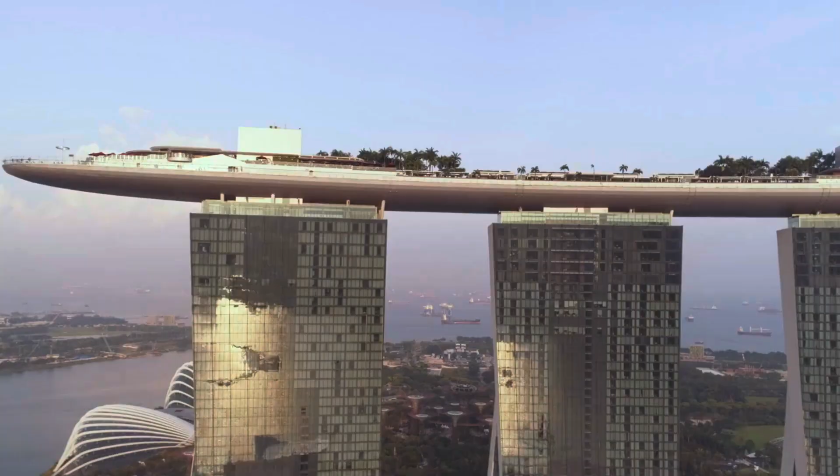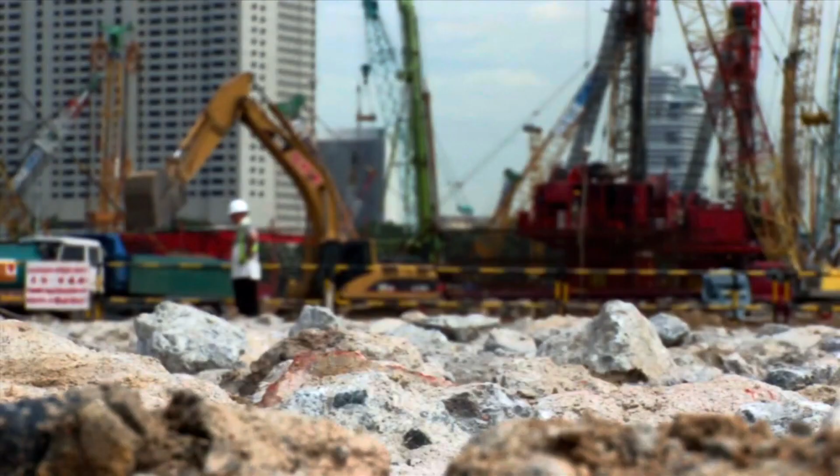During the construction of Marina Bay Sands in Singapore, engineers had to face such a challenge that they had never imagined. According to the building design, a sky park was going to be built on top of 3 towers, whose size was supposed to be larger than the U.S. Navy's Nimitz aircraft carrier. And when it was time for the construction of the sky park, engineers found a major fault in the building design.

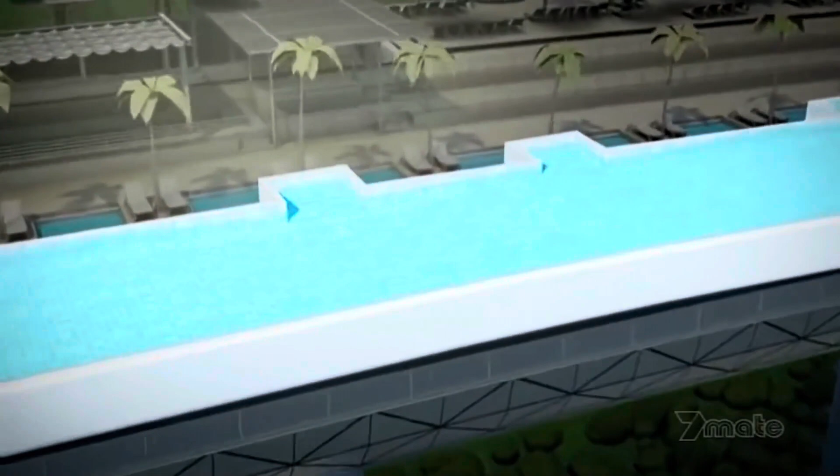The fault was that the 3 buildings might swing up to 200 millimeters during a tornado. And if the sky park was built despite this fault, then the swimming pool filled with 15 lakh liters of water might get cracked. The destruction that it would cause is unimaginable.

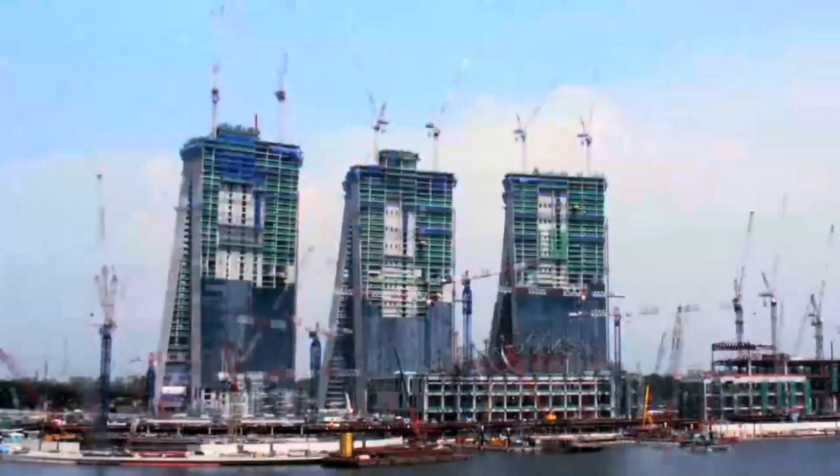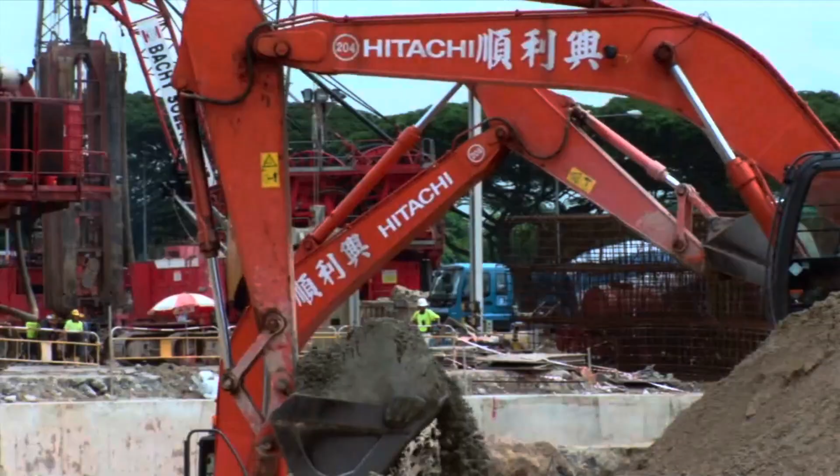On one hand, years of hard work and millions of dollars were spent on this project, and on the other hand, to drop the idea of the sky park would be like compromising with the beauty of the entire structure. They needed to find a solution which would keep the sky park safe despite the swinging of the building during strong winds. This was such a serious issue that the entire construction and architecture team was anxious.

But a miracle happened. Viewers, Singapore is a country which has only one city, and that is Singapore. The entire country is so small that it is slightly larger than the Indian city of Mumbai and a little smaller than the Pakistani capital Islamabad.

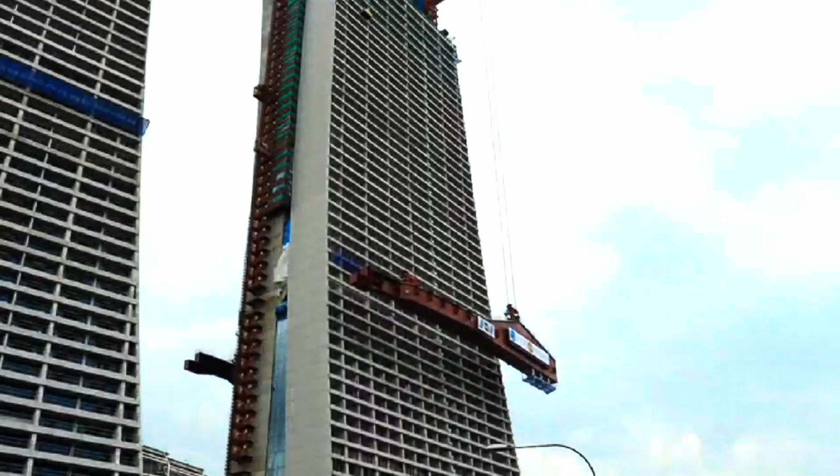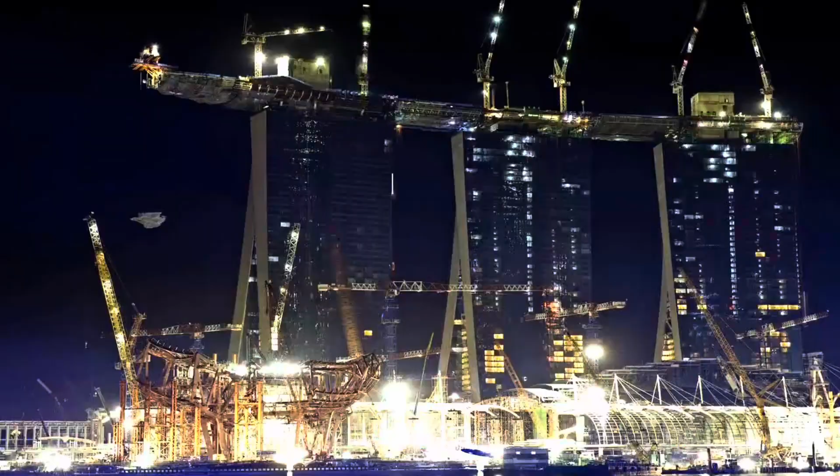Singapore's Marina Bay Sands is one of the most complicated construction projects in the entire world, and that's why it is called an engineering masterpiece. Engineers had to construct not 1 but 3 buildings, whose one portion was going to be bent, and that too taking support from the other portion.

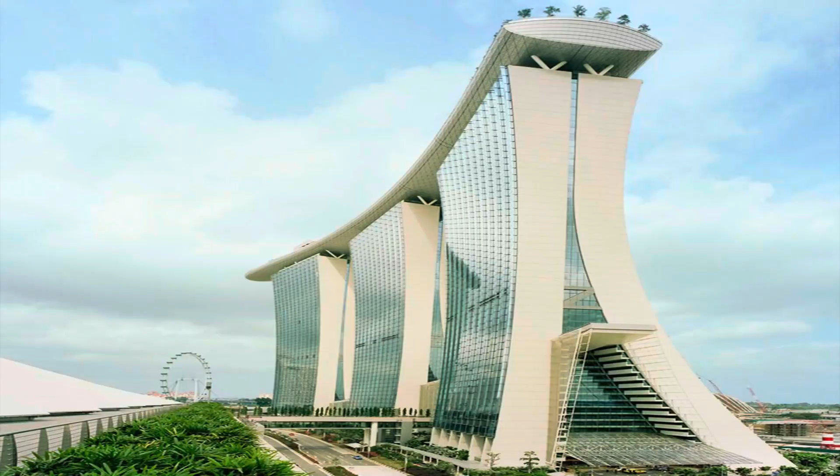The project, costing $8 billion, had 3 buildings 680 feet high, a sky park bigger than the aircraft carrier, a 200 feet high arts museum, and a floating entertainment pavilion were going to be constructed, that too above the water.

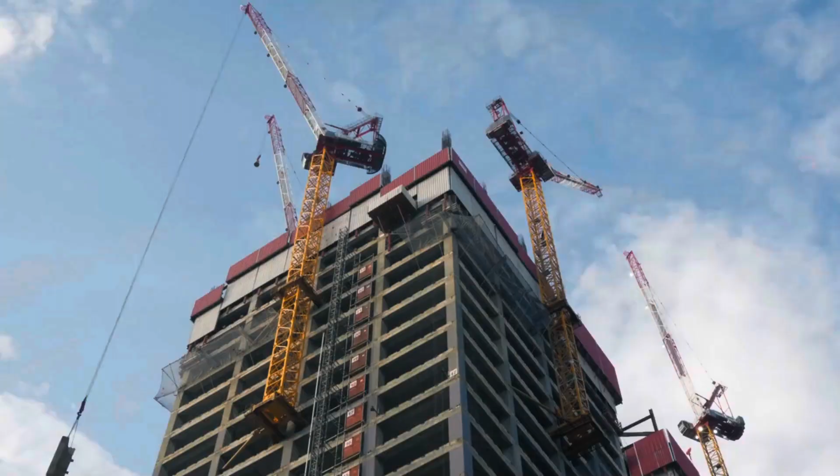The cost at which Marina Bay Sands was built, 5 Burj Khalifa-like buildings could have been made. And the labor and hard work needed to make this masterpiece was an astounding 16,500 workers, who worked together.

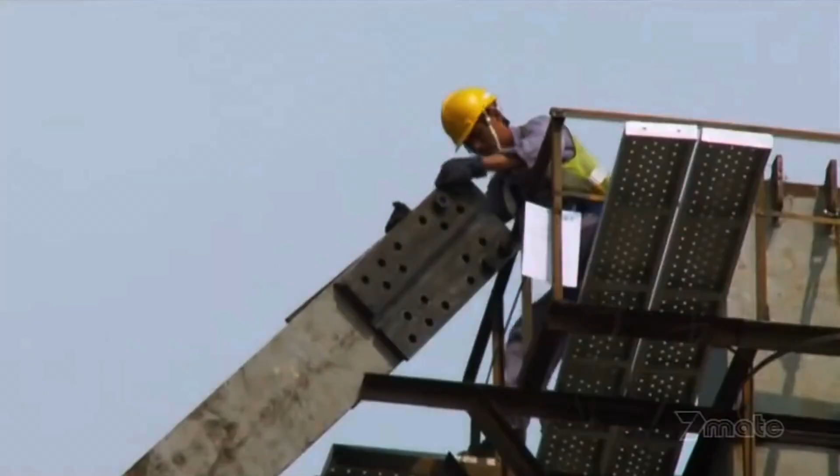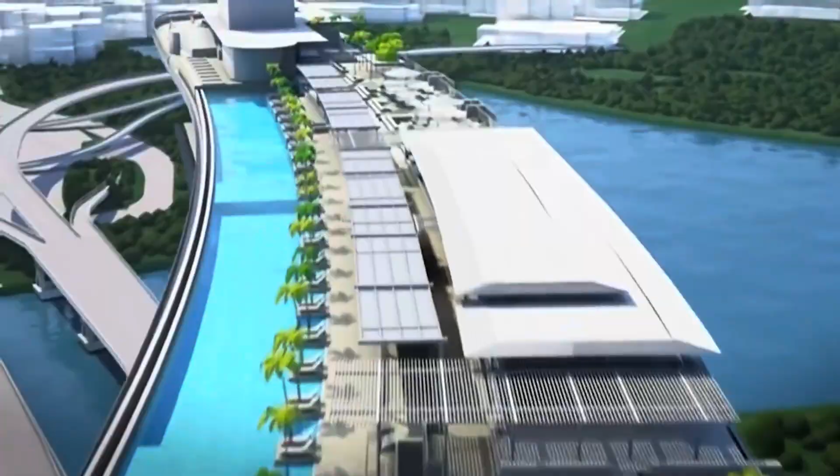Construction workers and engineers faced many challenges, like laying the foundation on soft wet soil near the seashore, to constructing a curved-shaped structure and a unique sky park over it. This was not only the first challenge of their life, but no construction project in the past had faced this kind of challenge. Let's come and see the challenges and their solutions.

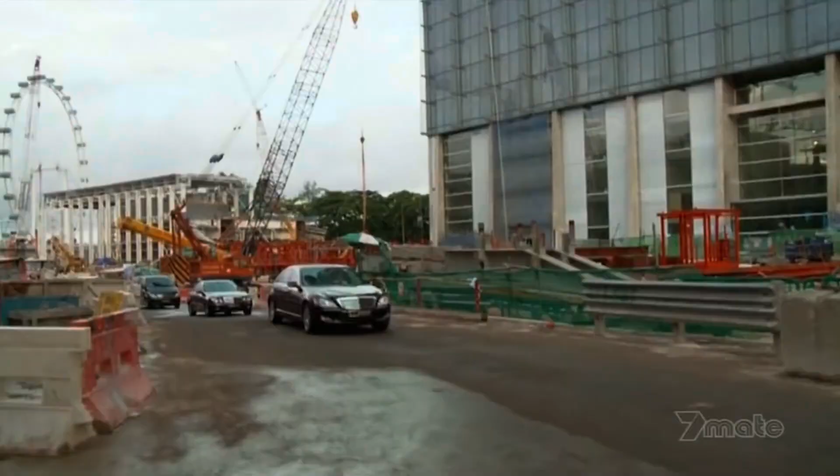Challenge number 1. It was American business tycoon and owner of Las Vegas Sands Corporation, Sheldon Adelson, who was behind the project, who has often been featured in Forbes' richest list. Adelson wanted to build a project that would become the identity of Singapore.

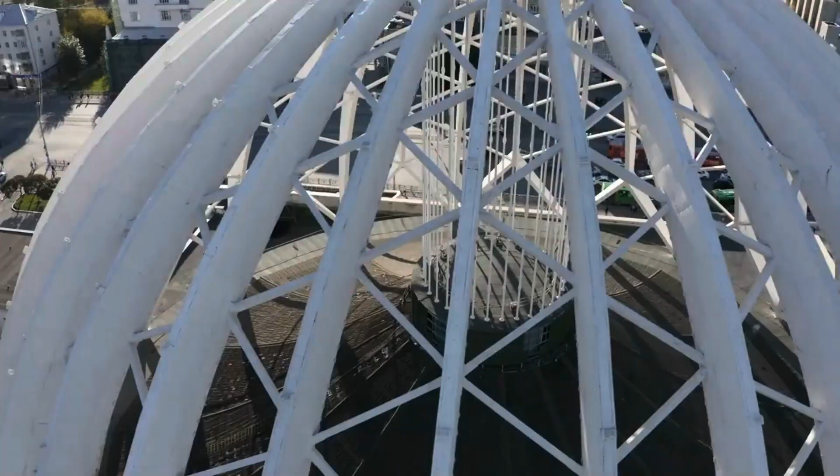And obviously, for such a project, its design had to be very unique. For this purpose, there was no better option than an architect like Moshe Safdie, whose curved designs are mind-boggling, but difficult to construct.

After months of hard work, Safdie presented his design. But this design presented a big challenge for the construction team. According to the construction team, it would take at least 7 years to complete the project, but Sheldon Adelson wanted to complete it within 3 years.

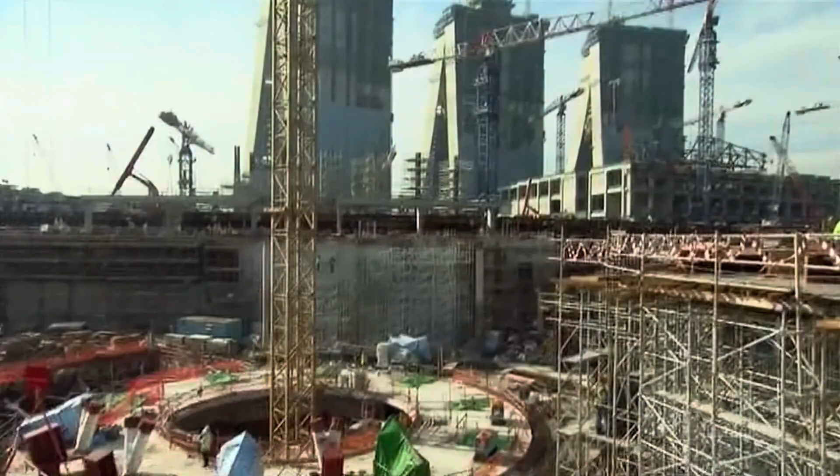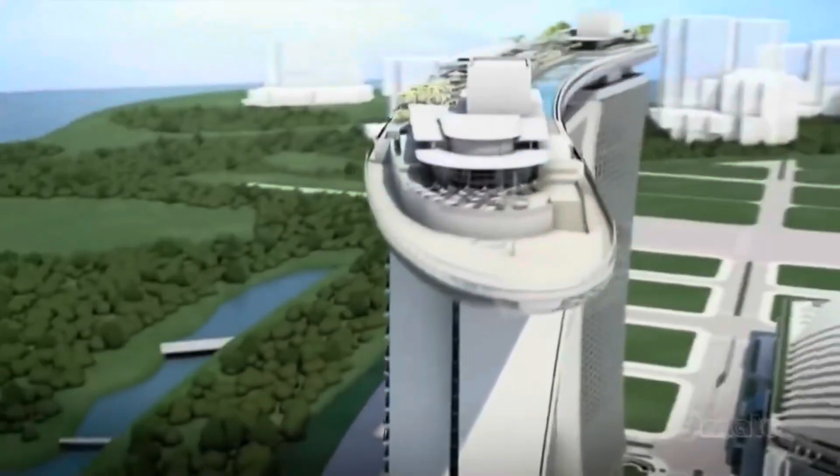In these 3 years, the entire project, with the 3 towers, its interior, museum, floating pavilion, and the most complex sky park, needed to be built. Accepting the challenge was a big achievement for the construction team in itself.

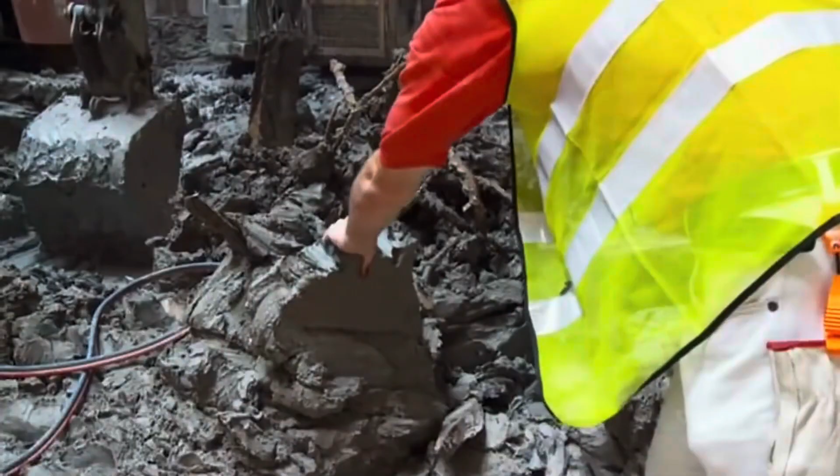Challenge number 2. The site chosen for the construction work was full of soft clay due to the proximity of the sea, which engineers call marine clay. The marine clay is very soft and it's very hard to walk over it, let alone construct something. And if the marine clay is not treated correctly, then it can prove disastrous, which was evident in Singapore's Nicoll Highway case.

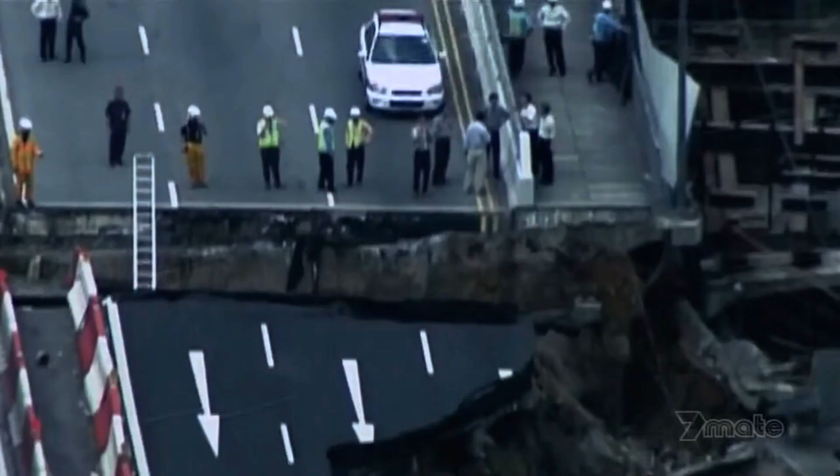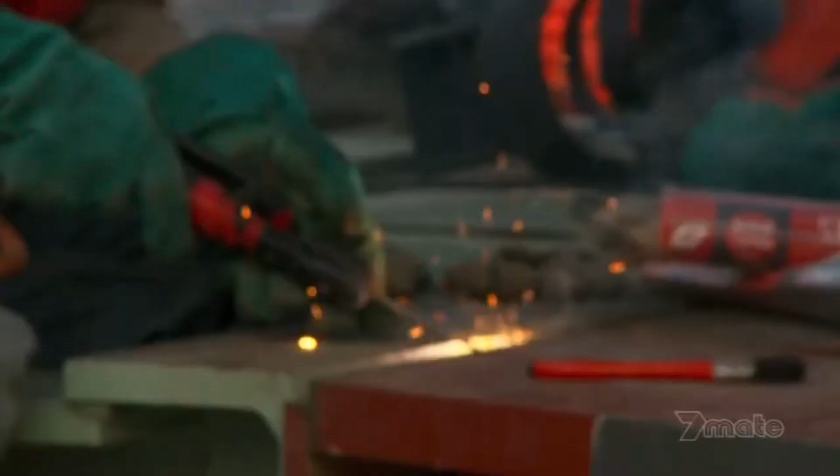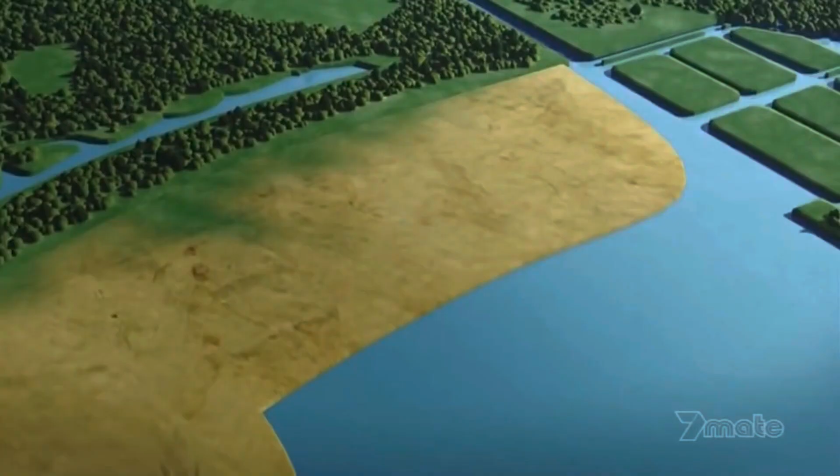A feature of marine clay is that if some of the clay is removed using an excavator, the clay surrounding the ditch fills it quickly. Therefore, it was necessary to find a solid solution so that the clay surrounding the ditch is not able to fill it. To address this issue, engineers decided to build a concrete wall of 1.5 meters thickness, also called a diaphragm wall. A 4,000 meter diaphragm wall was constructed, with a depth of 50 meters below the ground.

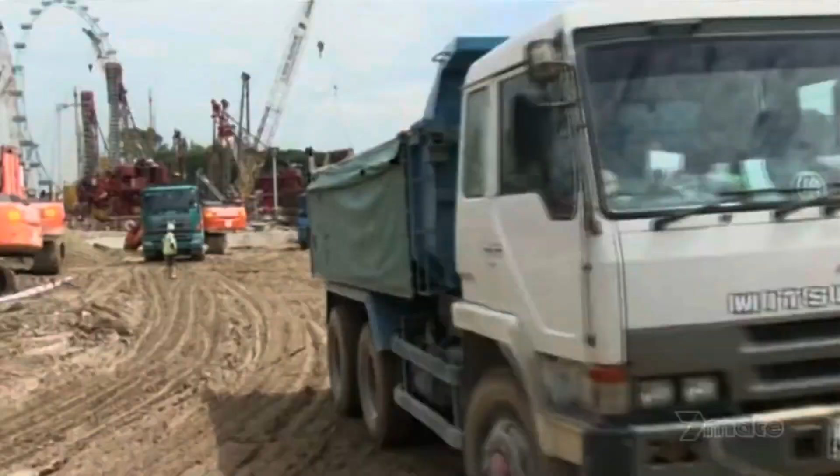With the help of excavators, the marine clay was removed from inside them. It took engineers 1 year to remove the marine clay. Now they were left with 2 years to complete the project.

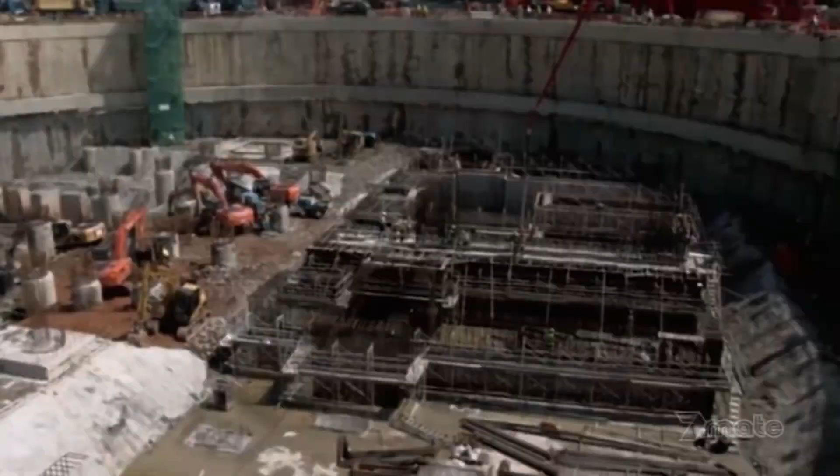Challenge number 3. After getting rid of the marine clay, engineers were left with only 2 years to complete the entire Marina Bay Sands, and this was really a very difficult task. The engineering team didn't budge down and decided to construct every part of the project simultaneously.

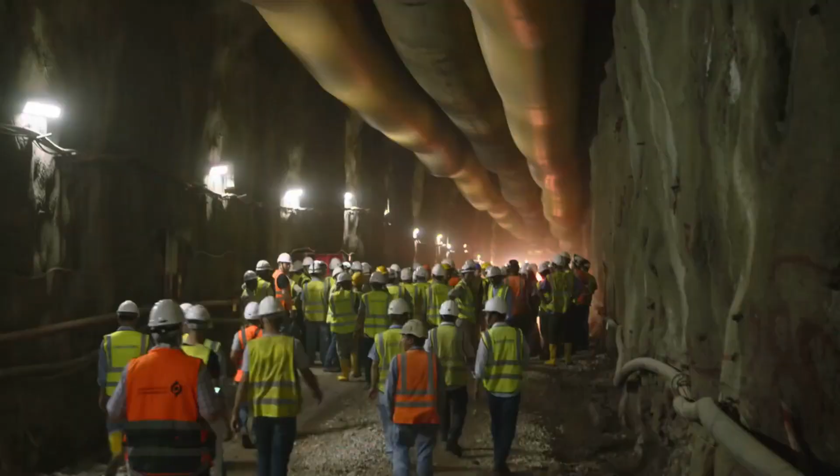But for that, a large number of workers was required. A mind-boggling 16,500 workers were hired to work day and night, in shifts. It was a daunting task to manage this army of workers and provide them food. For this purpose, the world's biggest canteen was made, where just for preparing one-time meal, $82,500 was spent.

Challenge number 4: the complication for the construction of the 3 towers was that one portion was straight and the other one was curved at a certain angle, and both parts would stand in support of each other. On paper, it looks easy, but practically building this was a challenge that nobody had ever tried before.

If it is not constructed with proper planning and calculation, the weight of the curved portion might break the straight portion, as seen in this domino effect. To implement this design practically, engineers found a very effective way.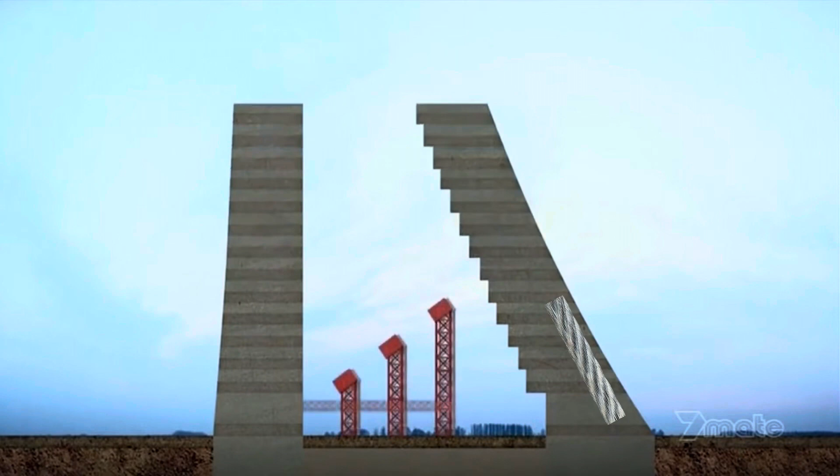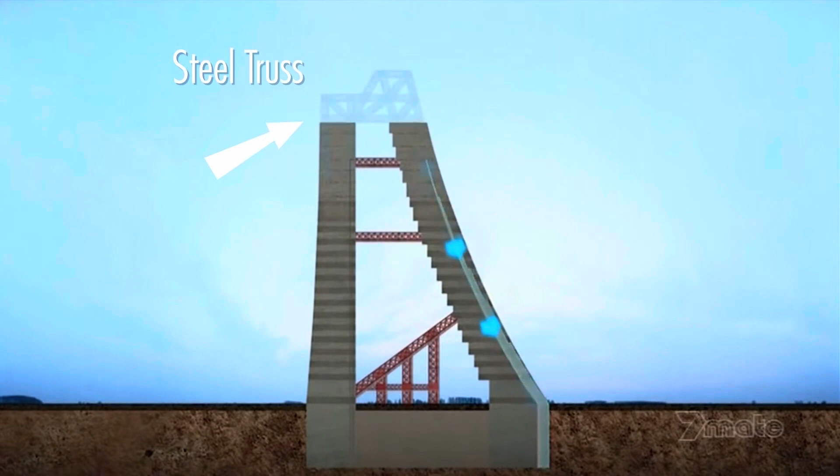With the help of concrete blocks, a floor was erected every 4 days. Steel wires were inserted inside the curved building for support, and as the height increased, both buildings were given temporary support of steel frames. At the 23rd floor, where the curved portion met the straight building, a heavy steel truss joined both portions, and the steel frames were removed.

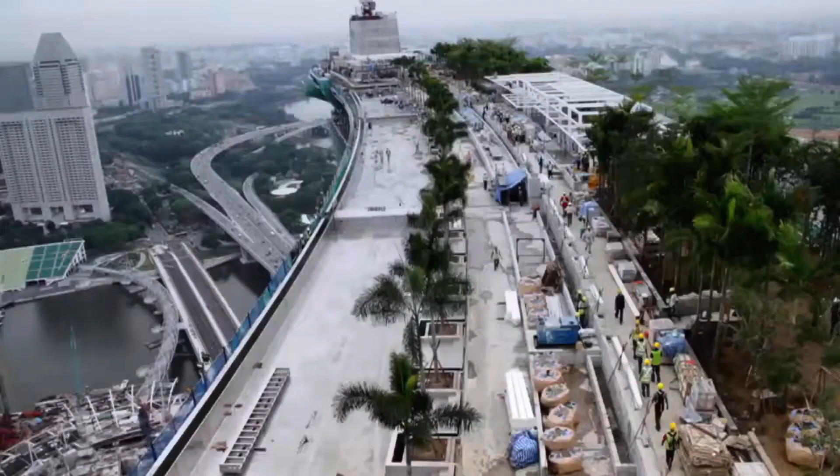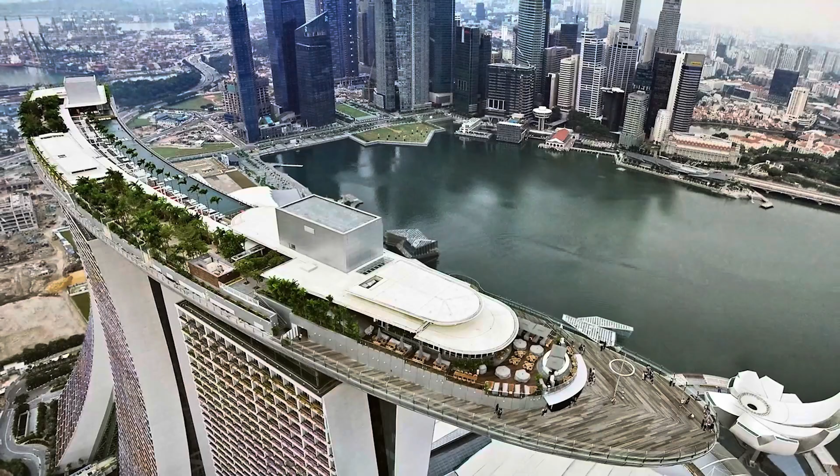Challenge number 5: 1.5 years have passed. Construction of the 3 buildings of Marina Bay Sands, the ArtScience Museum, and the Floating Crystal Pavilion was completed, and finishing work was going on. But one portion was still left to be constructed: the 1,115 feet long Sky Park, needed on top of the 3 towers. The engineering team had 6 months to complete this task.

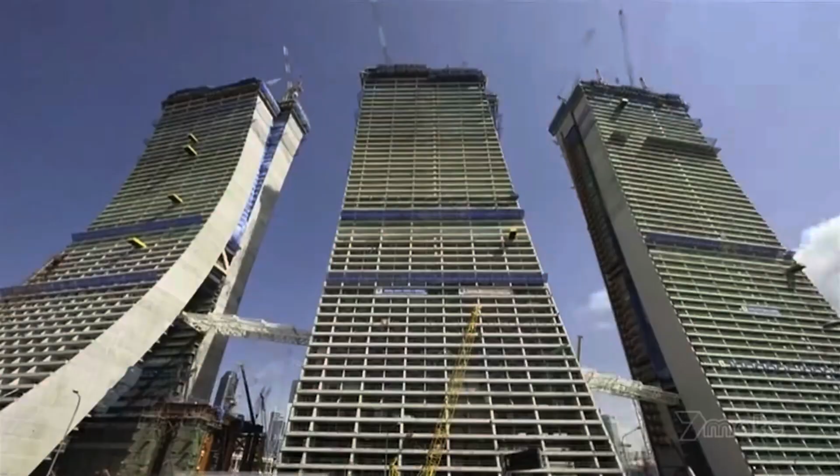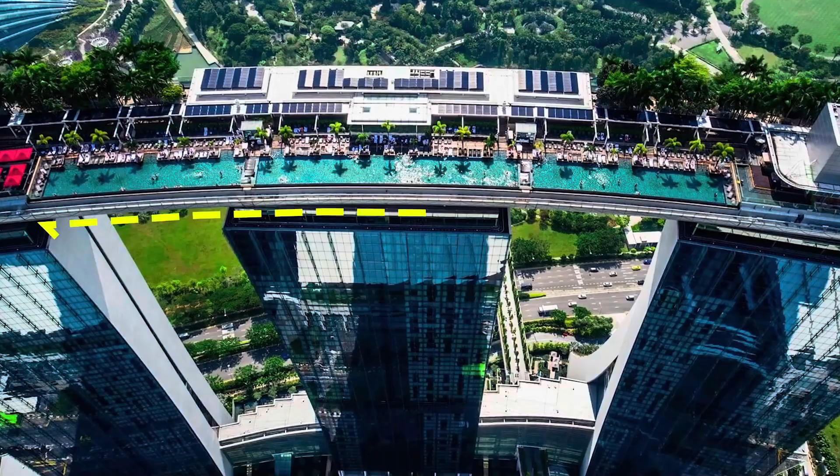Almost all luxury hotels and resorts in the world have a lot of open space, with gardens and pools. But as Marina Bay Sands was being built in a very congested area, it had no open space. So while designing, it was decided to have a large Sky Park at the top, hosting a 150 meters long infinity pool, gardens, open-air restaurants, a yoga center, and an observation deck for a 360 degree view of Singapore.

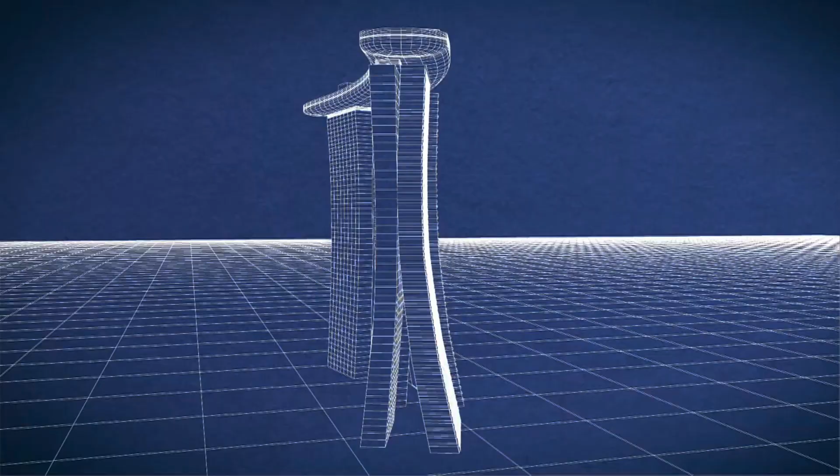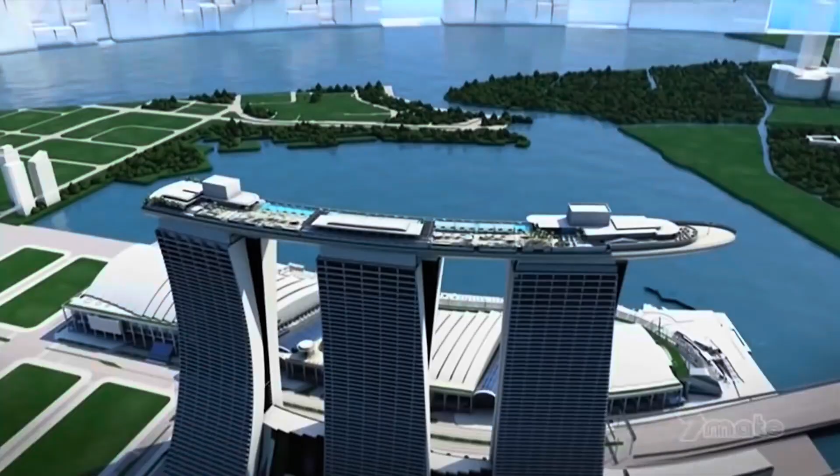But when the Sky Park was about to be constructed, engineers detected a major fault, delaying construction. Since all 3 towers were built independent of each other with no connection between them, engineers believed that during strong winds the buildings might swing in different directions, and if the Sky Park was built despite this, it could be disastrous.

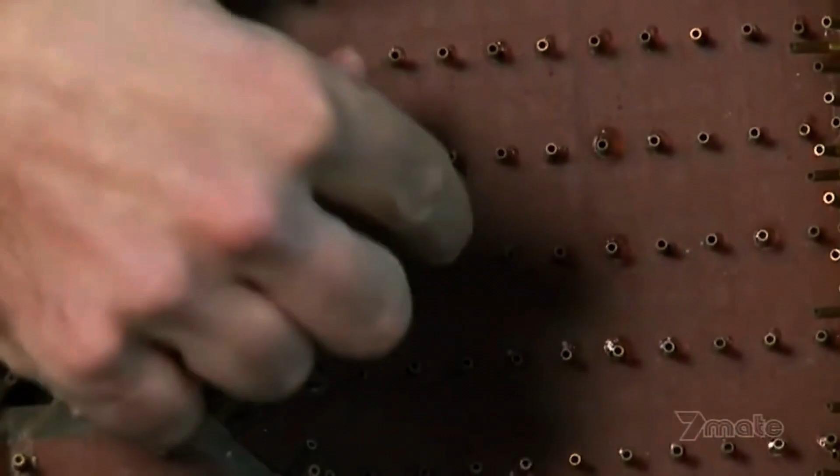To assess this risk, a wind tunnel test of the project model was required. With the help of wind engineering company CPP, pressure sensors were attached to the weak points of the model, and it was tested against an artificial typhoon. Unfortunately, the result was positive for the risk.

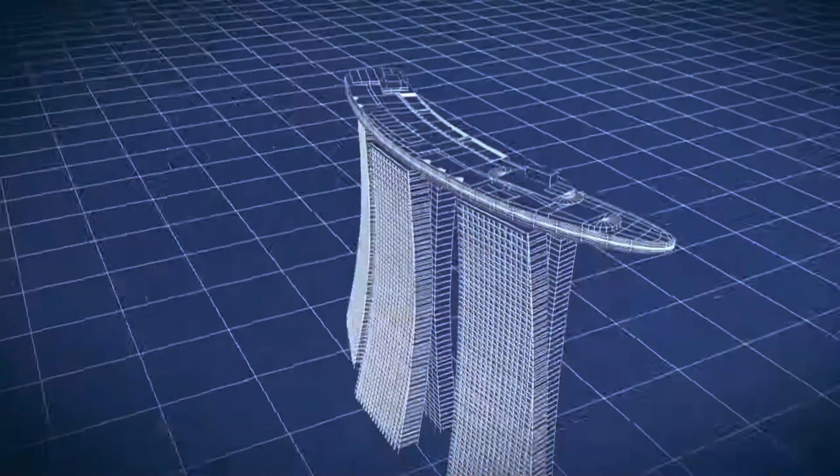Wind engineers revealed that during a typhoon, the top of the 3 buildings might swing up to 200 millimeters, almost the length of a mobile phone or a little more. Although it doesn't seem like a big swing, the nature of concrete is that it is not flexible, and a little pressure can crack it.

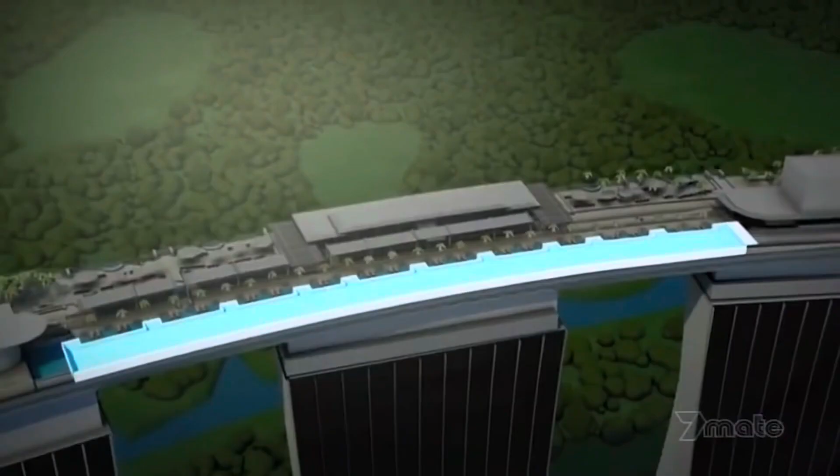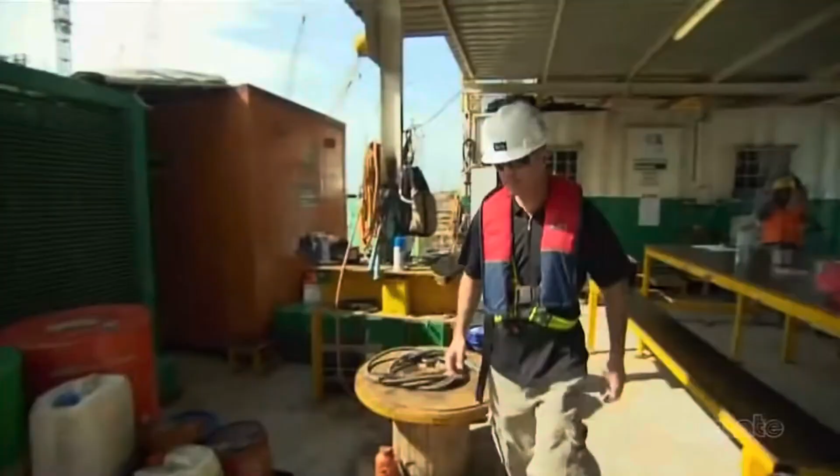If the Sky Park was built disregarding this risk, during storms cracks might appear in the 150 meter long infinity pool, and eventually a portion of the Sky Park might collapse. This news was depressing for the entire construction and architecture team. On one hand, there was 1.5 years of hard work by 16,500 workers, while on the other hand, millions and millions of dollars were spent.

For the past 1.5 years, workers, staff and engineers had become emotionally attached to the 3 towers. Therefore, breaking and rebuilding the entire structure was not an option. Engineers had to find a solution to keep the Sky Park safe despite the swinging. After months of brainstorming, a solution was found.

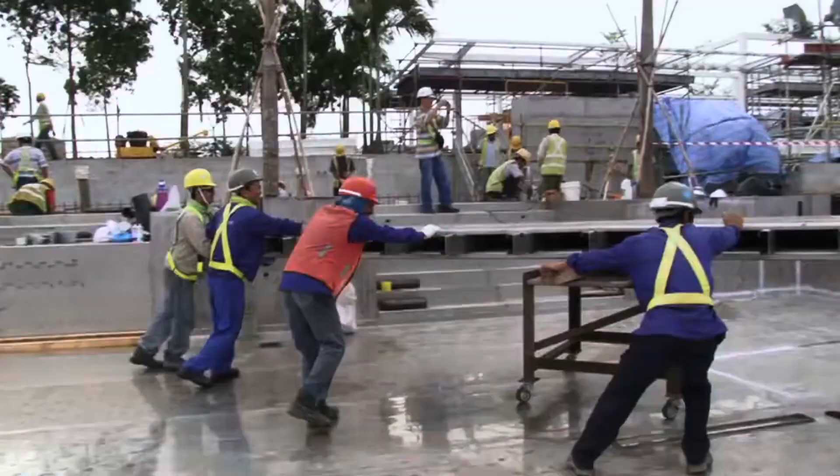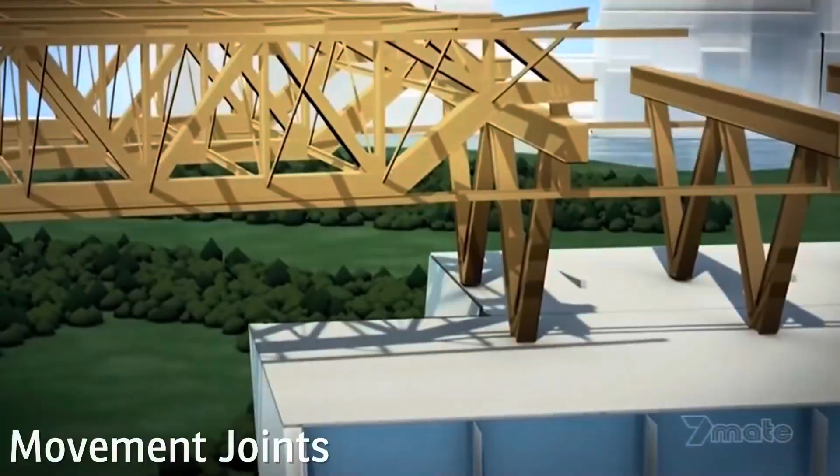Utilizing bridge engineering technology, it was decided to introduce movement joints, where the entire Sky Park would be built upon a steel bridge laid over the 3 buildings. Special movement joints in this steel bridge could absorb up to 250 millimeters of movement.

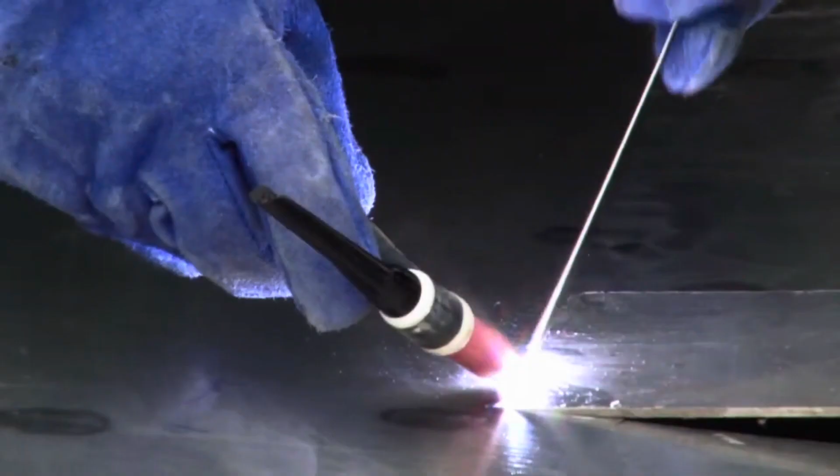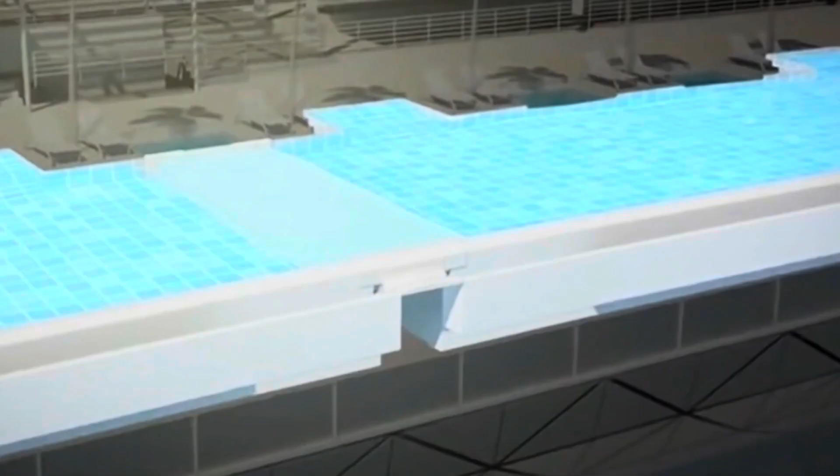Everyone understood the solution, but for that it was necessary to build the Sky Park in 3 different parts. That meant it was no longer possible to build a 150 meter long infinity pool. Engineers decided to divide the infinity pool into 3 sections of 50 meters each, with some space given in between them for movement.

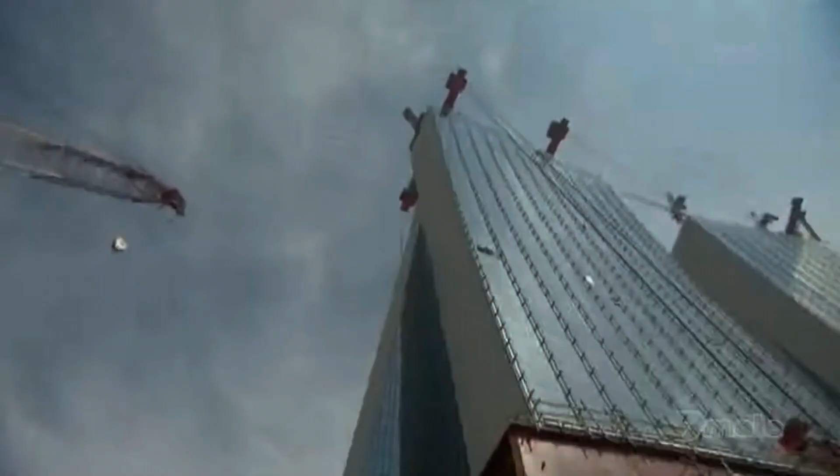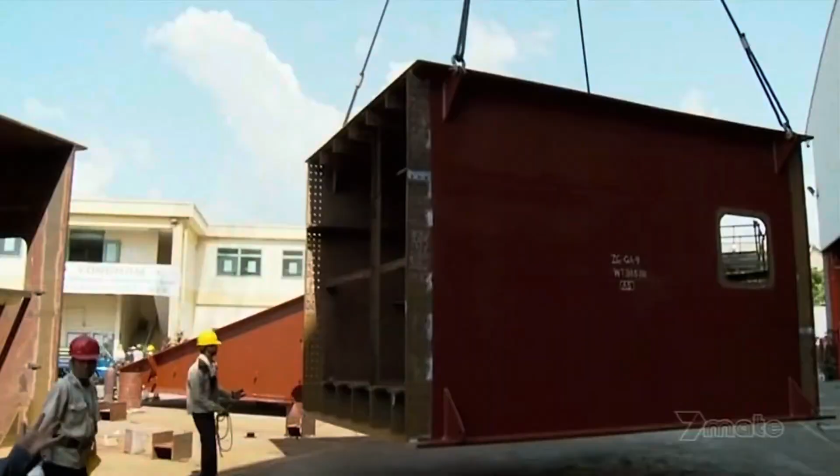Challenge number 6: in total, 1,400 tons of steel was needed for the construction of the Sky Park, a weight similar to 2 Antonov An-225 Mriya, the world's biggest cargo plane. It was impossible to transport this much weight to the top, so it was decided to divide the Sky Park construction into 14 segments and assemble them on top. To carry the 14 big steel structures up, the world's biggest lift was installed with the help of Swiss-French company VSL, which would carry one segment to the top in 16 hours.

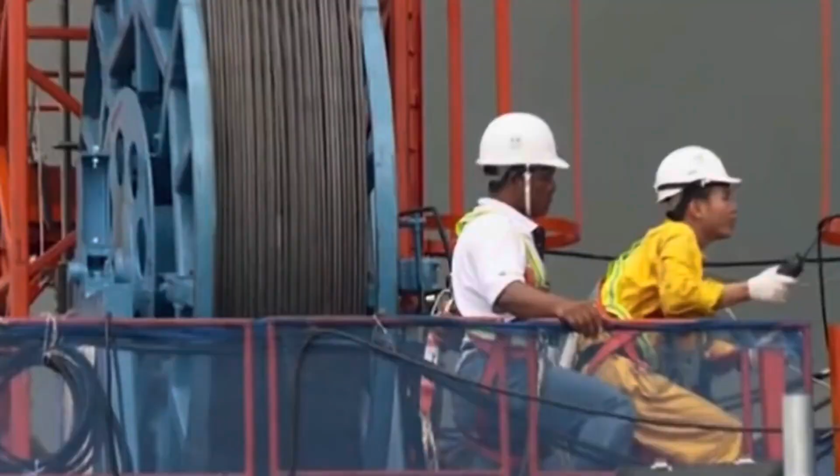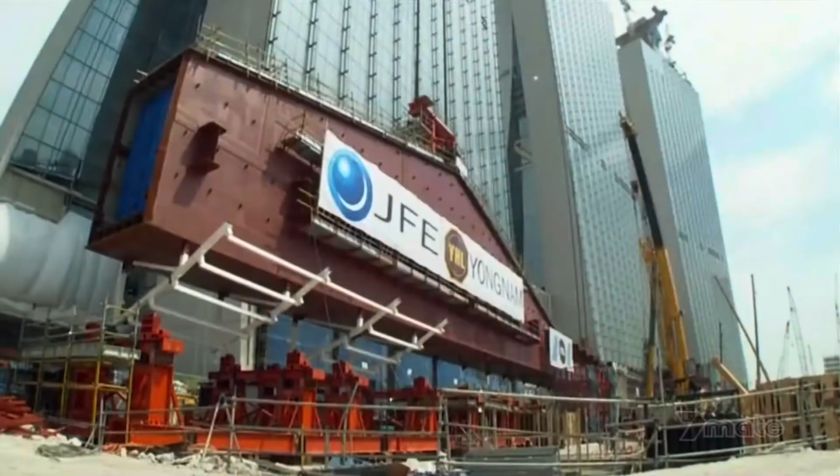As soon as the lifting process started, the danger of sea storms began lurking. This hanging 100-ton steel structure could damage the building by swinging in the storm, or even fall down. The lifting process started in the morning, was suspended for many hours due to the storm, and finally by midnight it successfully reached the top. Similarly, one by one, the entire 100-ton steel structures were lifted and the Sky Park was completed by assembling them.

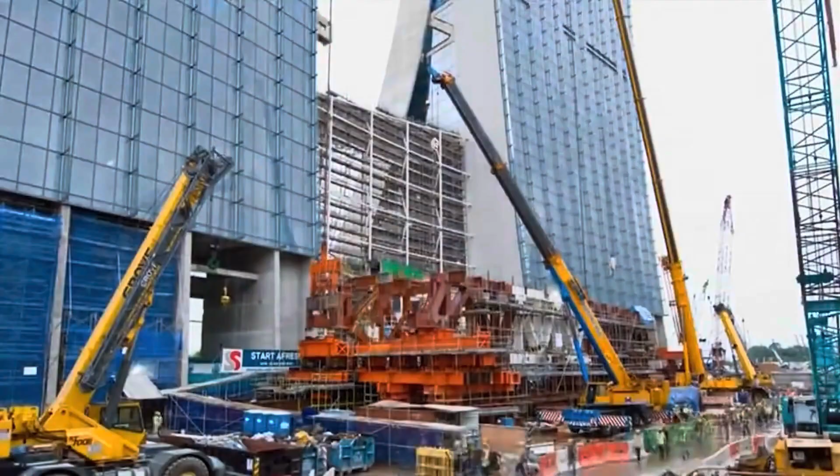Instead of 2009, construction of Marina Bay Sands was completed in 2010, with a delay of 1 year owing to the Sky Park. Today Marina Bay Sands hosts lakhs of visitors daily, but the hard work of 16,500 workers to build this masterpiece will always be remembered. Hope you will like and share this video.